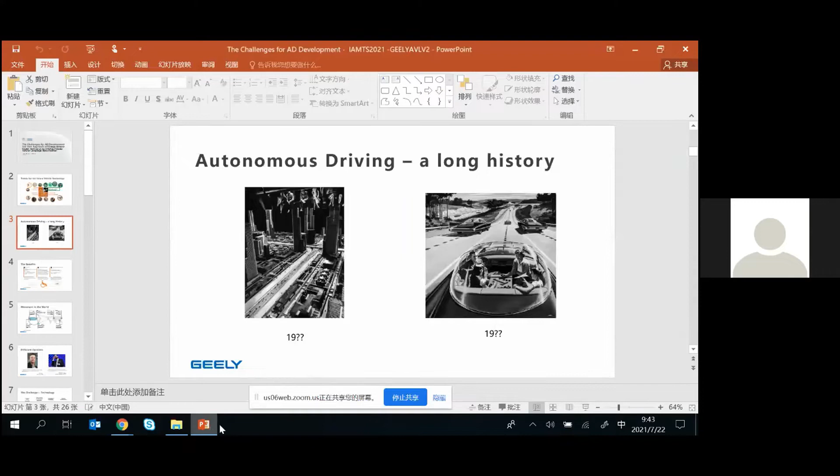On the right side, reflected in the middle, 1945 - this was an advertisement from an American company showing how life should look like in the highway. So autonomous driving has always been a dream for the automobile industry, and we do see the high benefit behind that.

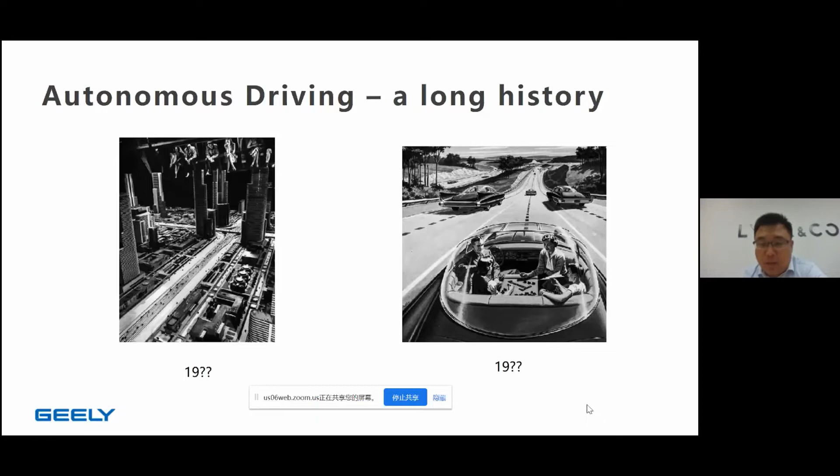What is the benefit? For sure, autonomous driving will help reduce accidents in traffic. Surveys prove that if there are more than 15% autonomous vehicles in traffic, it will reduce accidents by more than 20%, which means saving a lot of cost and also health benefits.

Autonomous driving will also help individual autonomy, which could be interesting for society. We see more and more older people who may not find it so easy to drive, and we hope autonomous driving will help them in the near future.

If we look at the situation in China, we see really heavy highway congestion and a huge driving time cost in traffic on a normal day. According to surveys, on average in China people spend at least 90 minutes every day in congestion in the mega cities, which means more than 24 cities in China - resulting in lost time and time cost for people. We hope autonomous driving and advanced autonomous driving functions will help with such topics.

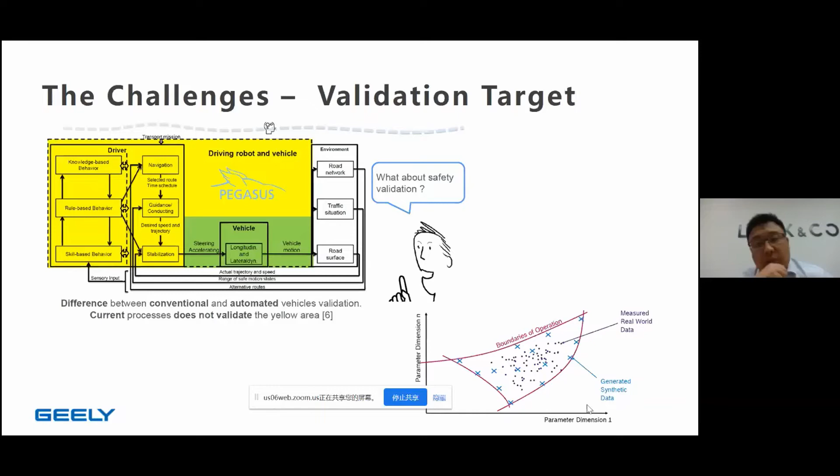The main topic and main aim for validation is to identify the system needs to cover different use cases and situations, and needs to provide full automation to make the verification efficient. This kind of validation system should show good robustness and reliability to ensure validation quality, which should also provide a high precision and safety metrics for the systems with a deliverable, measurable result.

And this kind of metrics could be realized with an AI-based system. What could AI, or let's say, what could be provided by such a data-driven system? We see a lot of use cases in different fields in the last decade with different learning algorithms, especially in the computer vision field, and in some kinds of reinforcement learning for behavior prediction and motion planning topics. They have shown good performance in this kind of field, and also a deliverable, precise result.

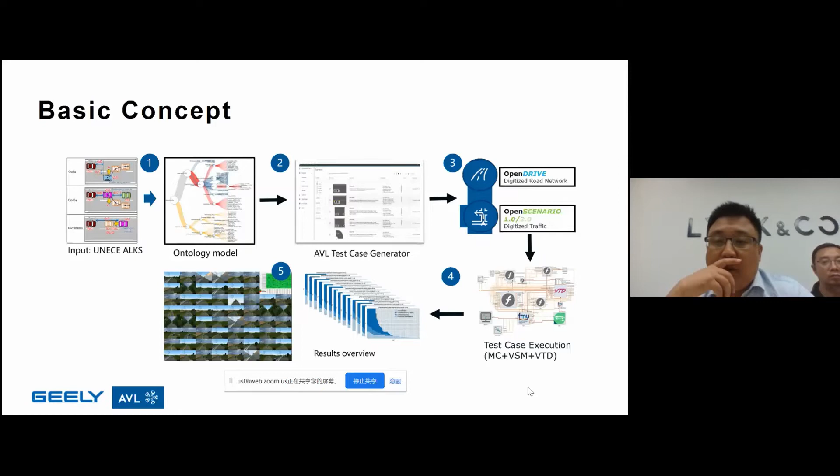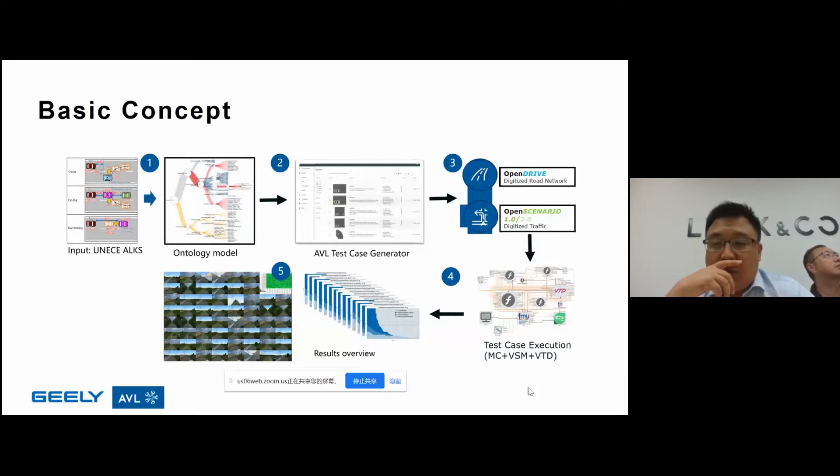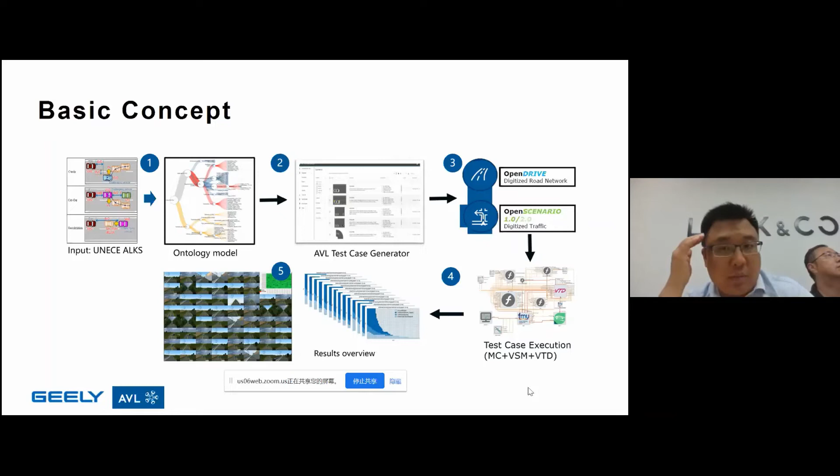Finally, this kind of traffic and scenario models with predefined test cases will be delivered automatically to an automated test system, which was also developed by AVL. This is what we call a test case execution, which consists of many co-simulation systems, and finally this will automatically provide us all the test results that meet the test coverage. Here are some basic details for this kind of requirement-based testing methodology.

In the next three slides, we want to show one good advantage of this approach: using ontology-based natural language specification to define and categorize the situation description. We know this test case consists of how to describe the test conditions - what we can normally imagine about the description of the road, the scenario, and also the environment. This kind of detailed description consists of more detailed element descriptions, describing what kind of road, what kind of vehicles, what kind of other traffic elements, and so on, need to be considered in these test cases.

With this kind of approach, we can describe and transfer all such conditions into a formal semantic language. With this semantic configurable language, it will help us to systematically describe all the situations and test conditions, and also help us to systematically generate all the elements we need to consider. What's more, it's also important to transfer this kind of formal description of test cases into a real standard scenario format, like OpenDRIVE or OpenSCENARIO.

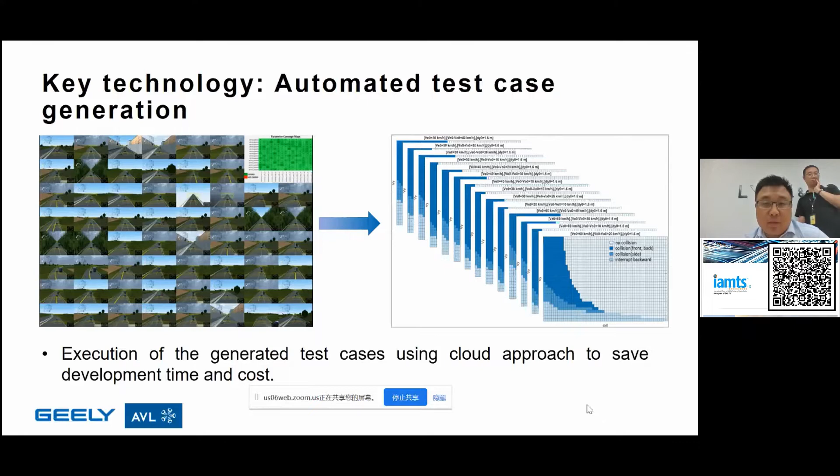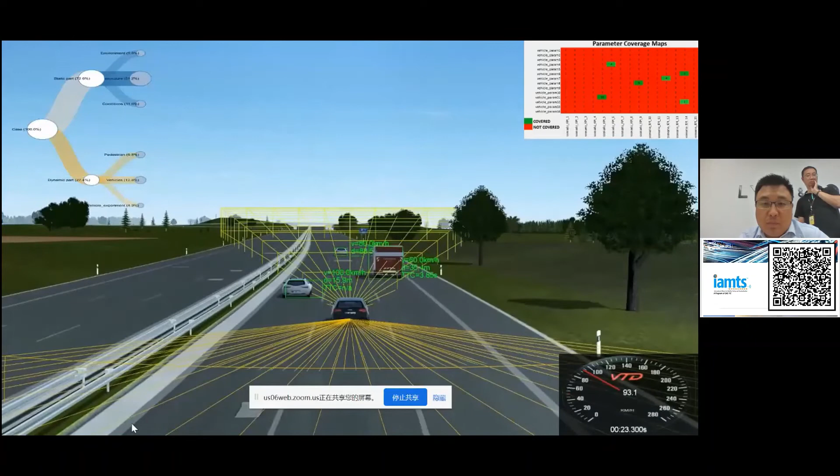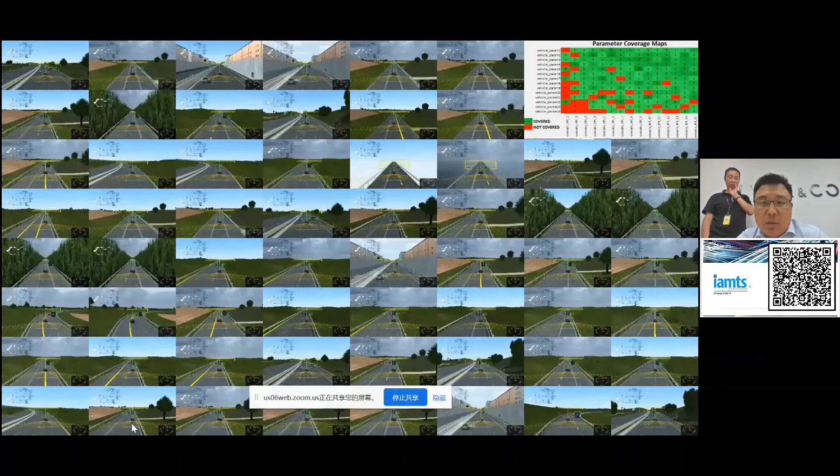We try to show a good animation regarding these tools. We see this is a methodology based on basic scenarios. It will realize all the possible test cases with static and dynamic elements, which will be generated and automatically executed in a short time, and finally give a fully good result, which helps us make a quick and reliable validation for systems.

So now I come to the last slide for today's presentation. Hopefully you have gotten the main ideas on the topic today. As mentioned before, we see a lot of challenges in this field. We are very honored to have this opportunity today to show the basic ideas we have seen and developed recently. For any questions and discussions, you are welcome.

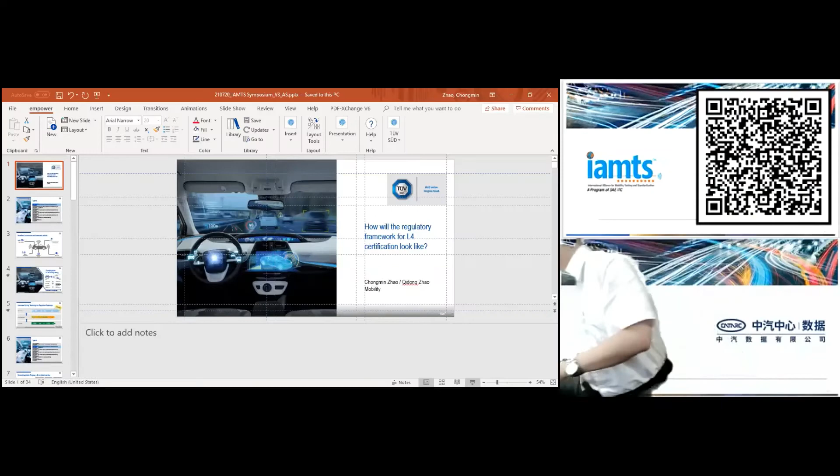My topic is how will the regulatory framework for level 4 certification look like. My name is Chongmin Zhao from TÜV Mobility. Today I will make the presentation together with my counterpart at CATARC, Qidong, who will focus on China, so we can provide you a whole picture about the global development of certification for level 4 vehicles.

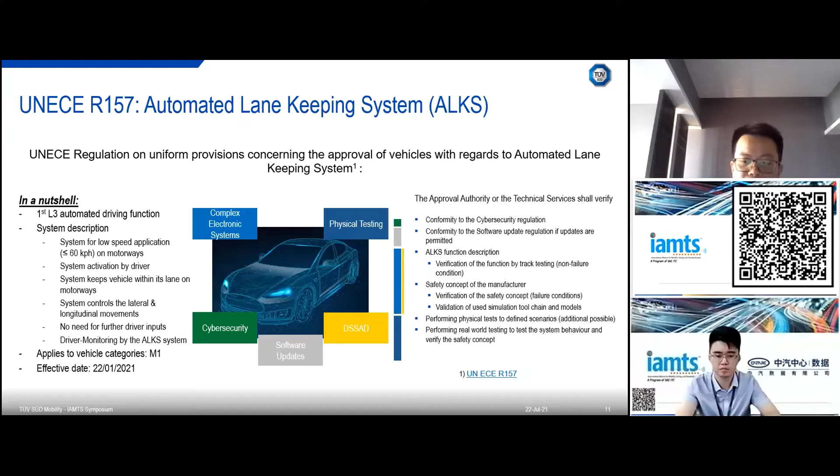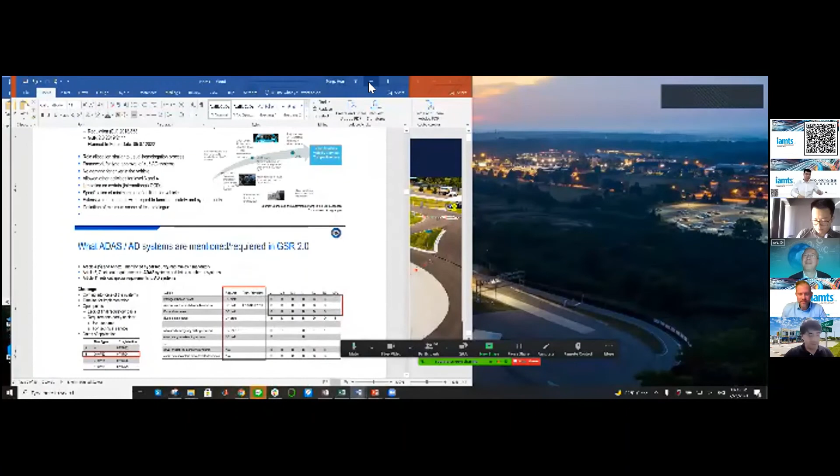Thanks, Hui. Hey, Alex. Hey, Georg. Hi, Alex and George, thank you for waking up so early. I know this is not the best time for the European participants. Can you see my screen? Yes. So I know we are running short of time, so I'll be as quick as I can. My name is Huei Peng, I'm the MCity director.

My job today for this talk is to talk a little bit about the world's first purpose-built test facility for connected automated vehicles. This is MCity, a very small facility. We're part of the University of Michigan, so we have a long tradition of automotive research, and we need to keep thinking about the future. Everybody knows the future is connected, automated, shared, electrified. When we started the public-private partnership, in particular the design of the test facility, we focused on the connected and automated side first, for the last about 6 years.

This is another view of MCity. Again, you can see it is pretty small, but it has two parts: one emulating the highway section, one more on the urban side. I'll give you a quick tour of the various designs and what scenarios we can test at MCity. We are very close to the campus, and let me give you the tour now.

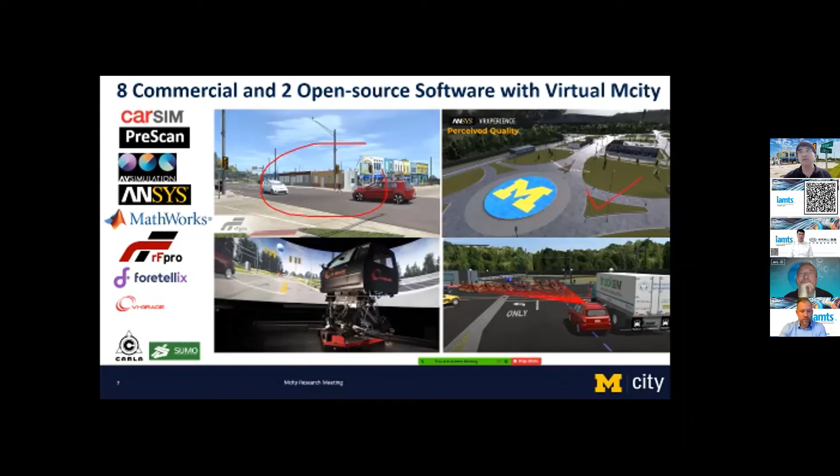Okay, so obviously we are not just about a test facility. We've been working with many partners. Here are examples of 8 different commercial softwares and 2 open source softwares with virtual MCity. Some of them show very photorealistic simulation of MCity, some focus on virtual reality, driving simulator, or sensor modeling, and so forth.

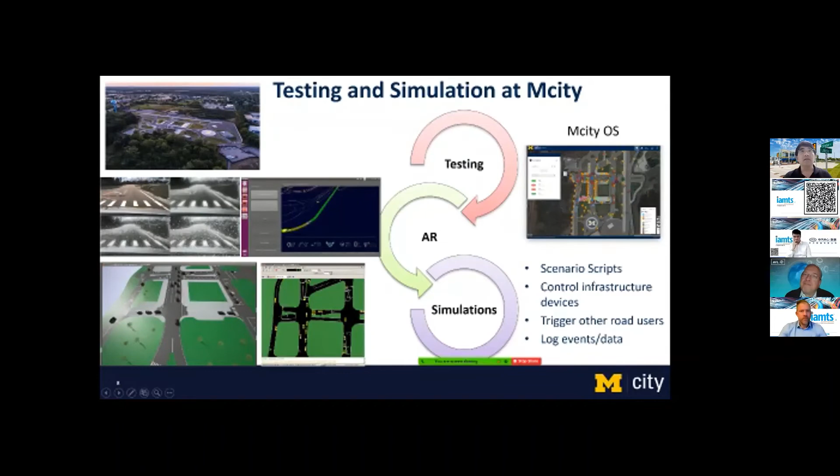So I will actually jump to talk about two major things we have been working on recently. Number one is the evaluation of highly automated vehicles, which we call the Mcity ABC test concept.

ABC is building on the idea that the future belongs to a scenario-based testing process, but we also need accelerated evaluation, meaning we don't have time to test millions of miles. There must be a rigorous way of approaching million-mile driving using math. We also need to worry about corner cases. So ABC means accelerated evaluation, behavior competence, and corner cases. Our definition of corner cases may be quite different from others' definition.

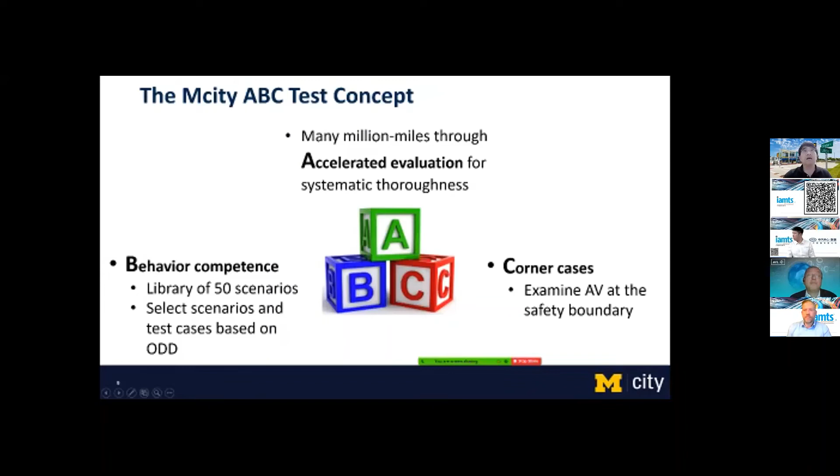I think the cornerstone of the ABC test is a scenario library. We've been working with the IAMTS Working Group 1 to see whether we can converge to a common set of scenarios. Here is a list of 50 scenarios.

The idea is that a highly automated vehicle, depending on its ODD, will pick only a subset of the scenarios. Then we need to figure out how to pick the scenario test cases in such a way that we achieve accelerated evaluation and corner cases. Achieving this really depends on how you choose the test cases.

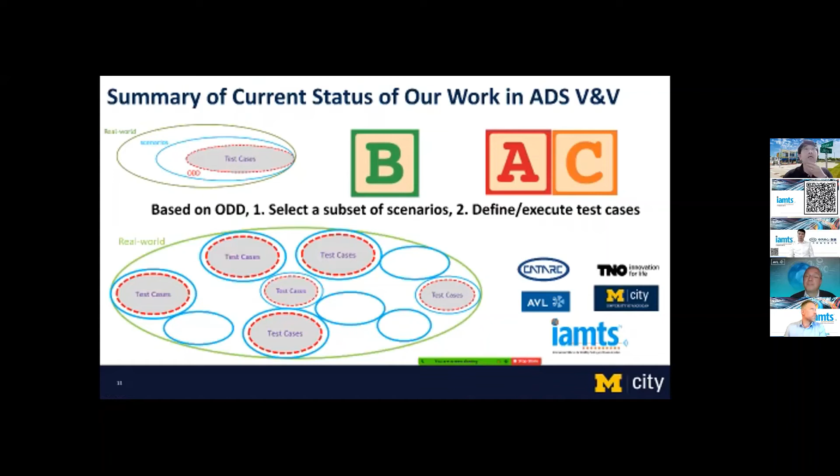We've been working with CATARC, AVL, TNO, and many others at IAMTS, discussing the idea of collecting data and building models. I won't go into the details of how to do this here, but collecting data is very important.

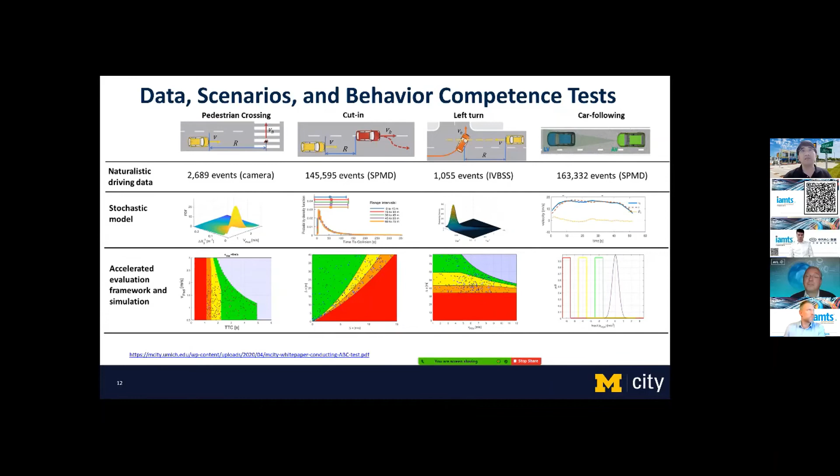So let me show you a demo that we ran with several scenarios, representing examples of our ABC test. In this example test loop, an ABC test car will encounter 7 different scenarios in a single loop.

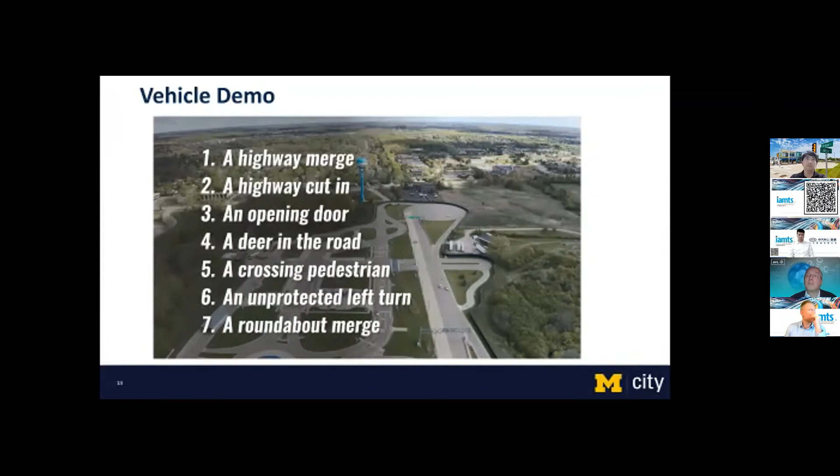This test loop consists of: 1. A highway merge, 2. A highway cut-in, 3. An opening door, 4. A deer in the road, 5. A crossing pedestrian, 6. An unprotected left turn, and 7. A roundabout merge. The test loop begins with the highway merge.

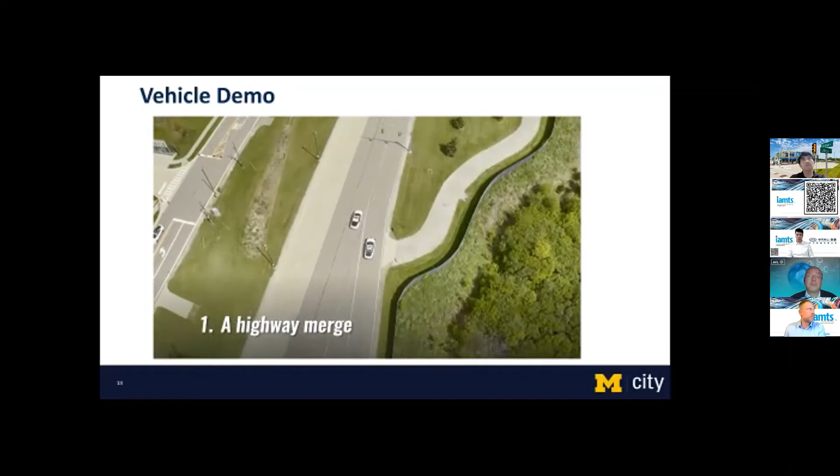The test car approaches the highway on an entry ramp. The challenge car remains in the right-hand lane, preventing the test car from immediately merging. A successful test would involve the test vehicle slowing down or coming to a smooth stop before safely merging, preventing the test vehicle from hitting the challenge vehicle.

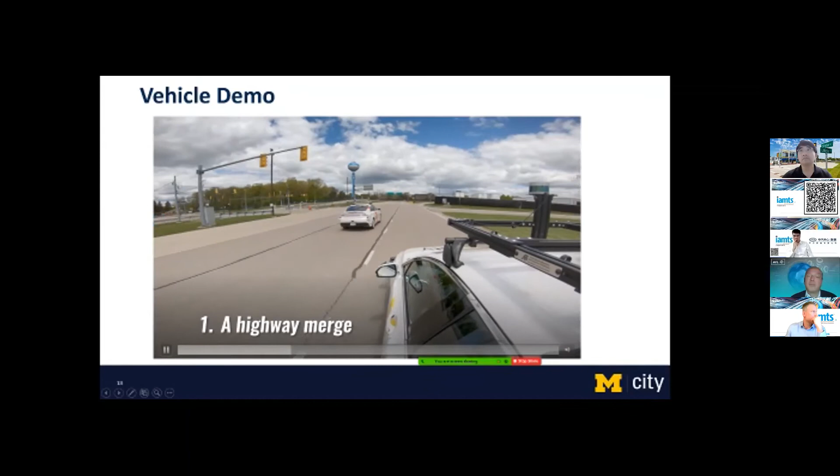In the second scenario, the highway cut-in, the challenge vehicle approaches the test vehicle from the left and abruptly cuts in front of it. A successful test would involve quickly slowing the test vehicle down to avoid hitting the challenge vehicle.

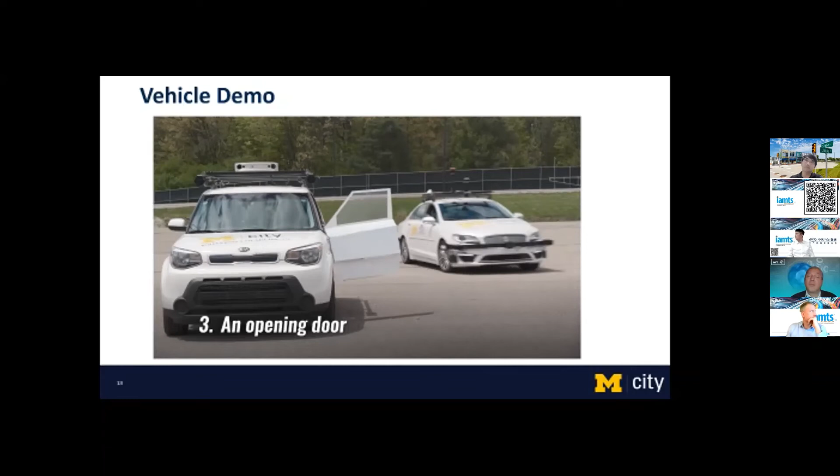Next, for the opening door test, the test vehicle approaches a stationary challenge vehicle from the left. The challenge vehicle's door opens abruptly into the test vehicle's path. A successful test would involve the test vehicle successfully swerving to avoid hitting the open door of the challenge vehicle.

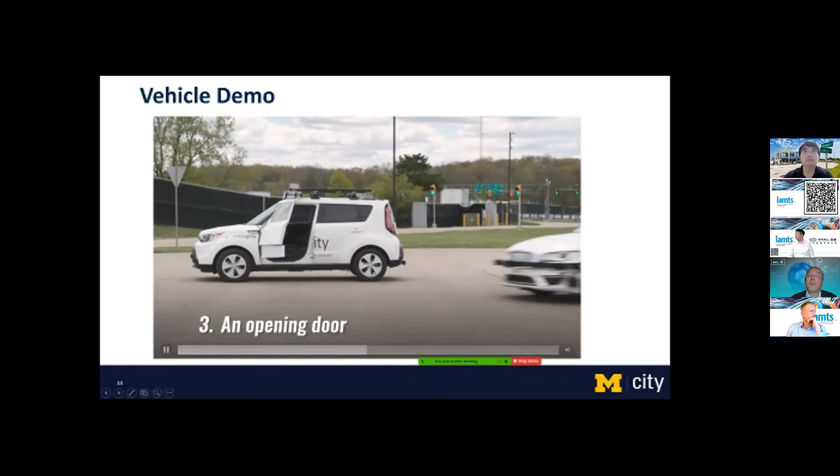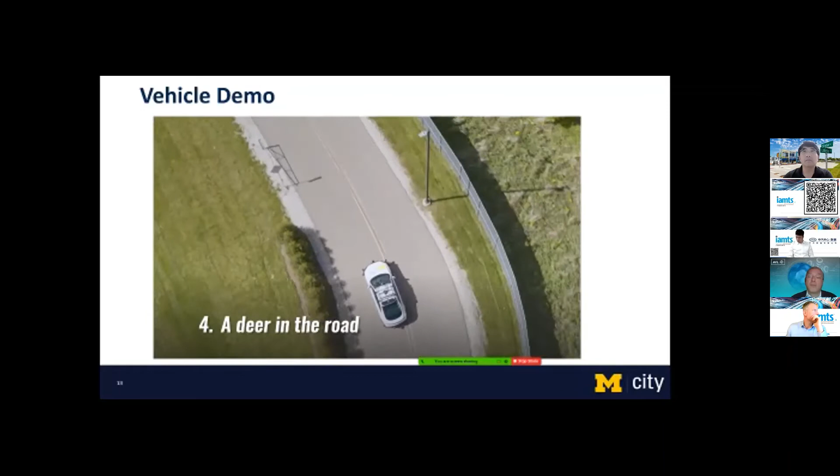The fourth challenge places an obstruction in the form of a deer on a blind curve on the right-hand side of the road, directly in the path of the test vehicle. A successful test would involve the test vehicle slowing down and proceeding cautiously.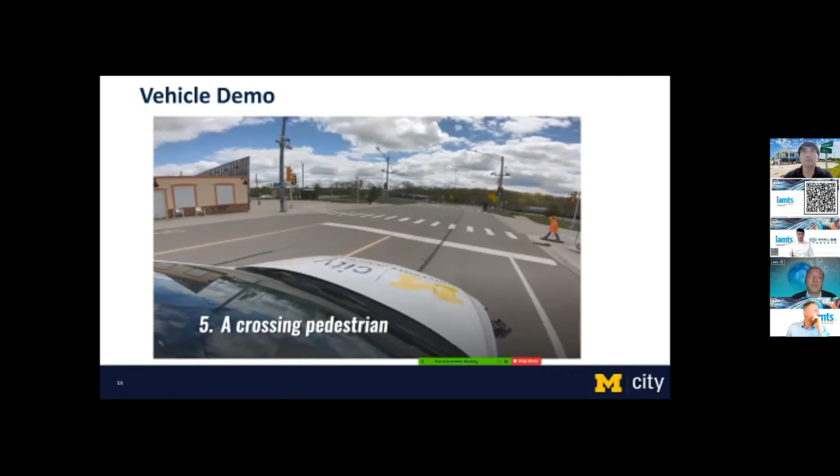For the next scenario, the crossing pedestrian, a mobile robotic platform representing a pedestrian abruptly moves onto the street into the path of the test vehicle. A successful test would involve bringing the test vehicle to a smooth stop, preventing it from hitting the pedestrian.

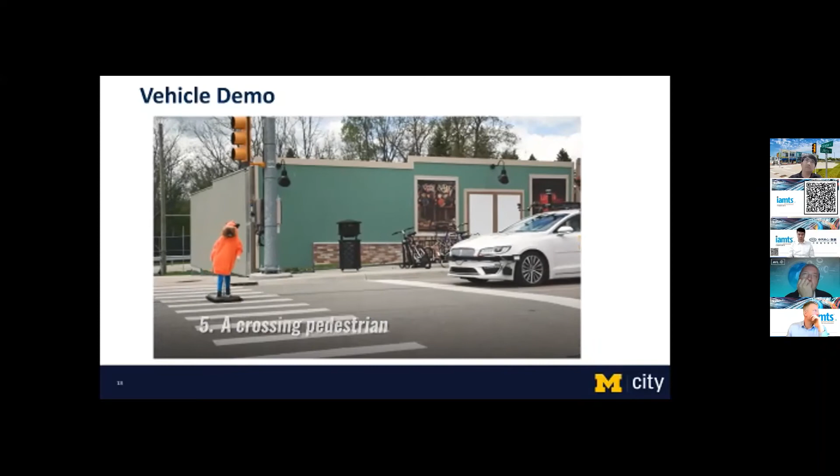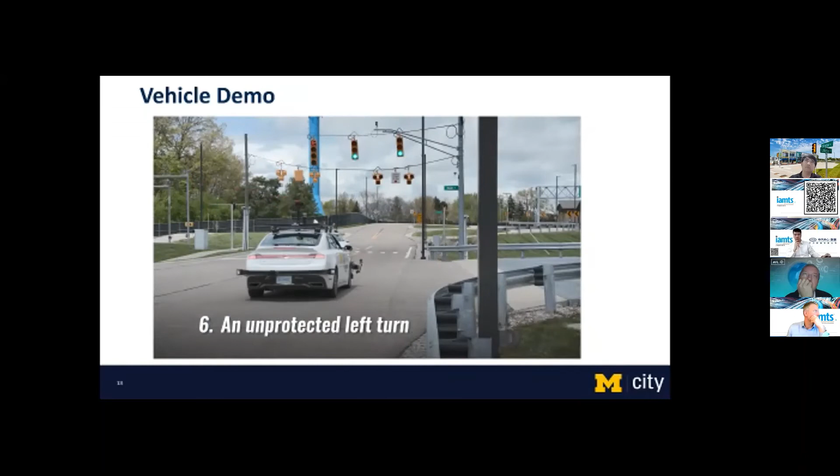In the sixth scenario, the unprotected left turn, the test vehicle approaches an intersection. From the opposite direction, the challenge vehicle makes a left turn directly into the path of the test vehicle. A successful test would involve bringing the test vehicle to a smooth stop, preventing it from hitting the challenge vehicle.

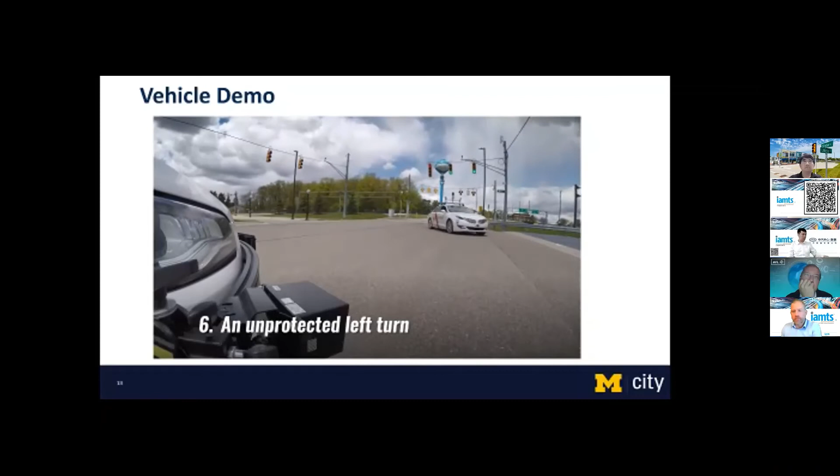For the final challenge, the roundabout merge, the test vehicle enters a roundabout. As it circles around, the challenge vehicle enters the roundabout, merging suddenly in front of the test vehicle. A successful test would involve the test vehicle slowing down or coming to a smooth stop, allowing the challenge vehicle to safely merge and preventing the test vehicle from hitting it.

All right, so another thing that we have been working on these years is the concept of roadmanship. So I'll play a couple of videos showing Waymo test vehicles.

So sometimes a lot of these scenarios are, there is no crash, the vehicles are perfectly safe, but people watching those Waymo vehicles say that there's something wrong. The vehicle wasn't driving nicely. So the question is, how do we understand that safety is not enough, but how do we define the behavior that we call roadmanship, and how do we measure that?

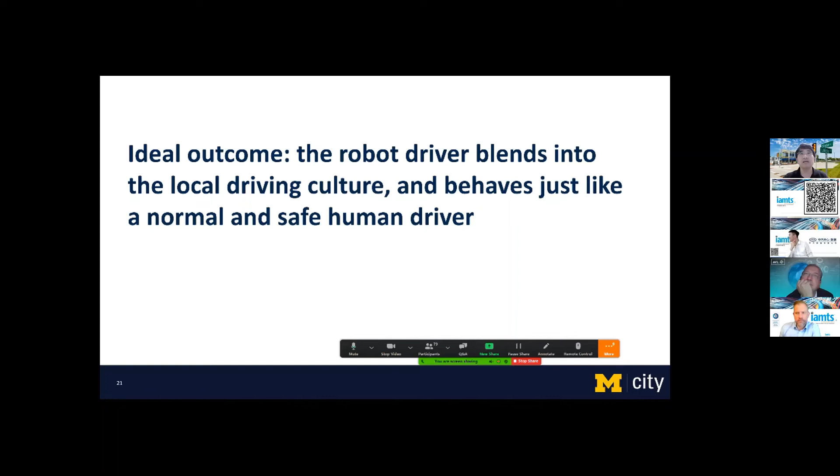Similarly, of course, you can imagine how to drive in a roundabout is another possible question. People have been asking, how do you drive near a roundabout? What kind of gap should you take or not take? So we have been doing a lot of data collection like this.

The ideal future is that we'll use the data collected from human driver behavior, and then start testing, for example, for a roundabout or an unprotected left turn. Somewhere in the middle, if the gap was accepted, we'll keep moving in one direction. If not accepted, we'll move in another direction. Then we look at the gap acceptance, and that can be the basis of judging whether the human driver is normal, too aggressive, or too conservative. The idea is that this may become part of, say, a 5-star ranking system.

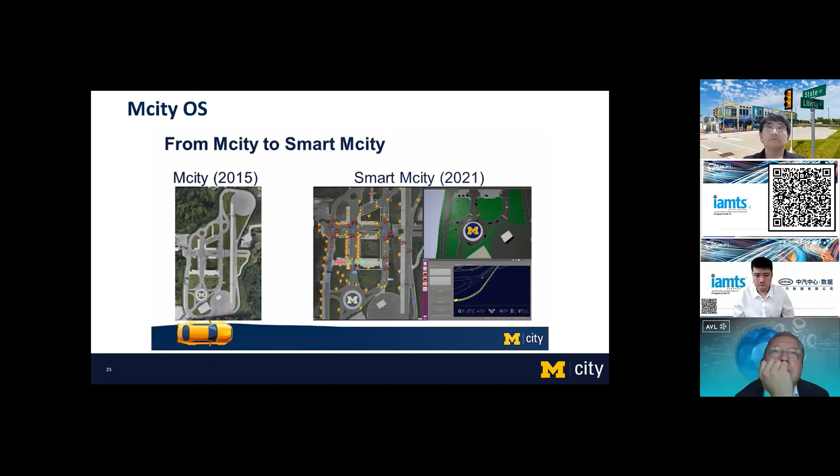To solve this, we created a framework we call Mcity OS. It's a cloud-based tool we've developed that lets you create and execute complex AV test scenarios using an app on your laptop or smart device. Think of Mcity OS as the nerve center for the Mcity test facility, or for any test facility. It understands the location and motion of everything, including the vehicle we want to test, and coordinates responses at the right time and in the right place. You can write scenarios in a graphical tool we've built called Skyline and load them into Mcity OS.

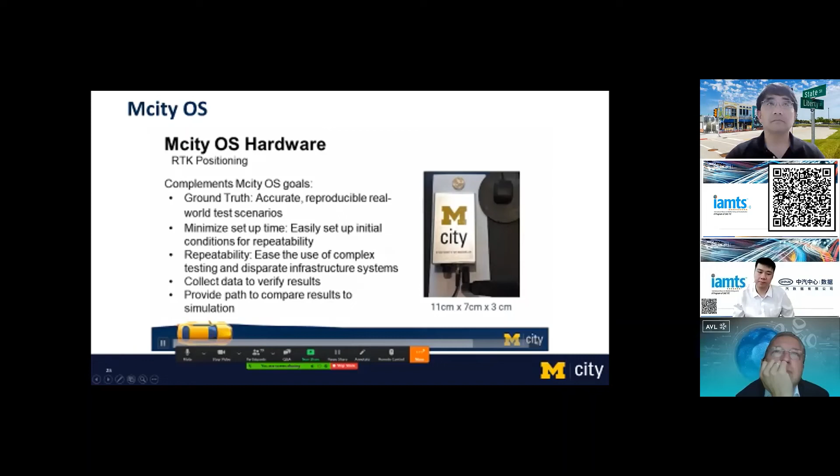To make Mcity OS aware of the vehicle we're testing, no complex instrumentation is required. Simply attach our positioning hardware to the outside of the vehicle and power it on. Frameworks like Mcity OS play a critical and supporting role in carrying out the validation and verification tests on AVs as they become capable of handling the role of driving safety.